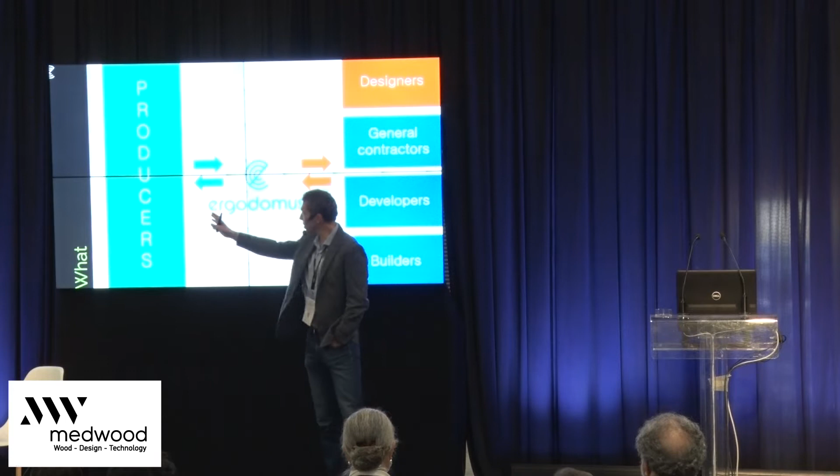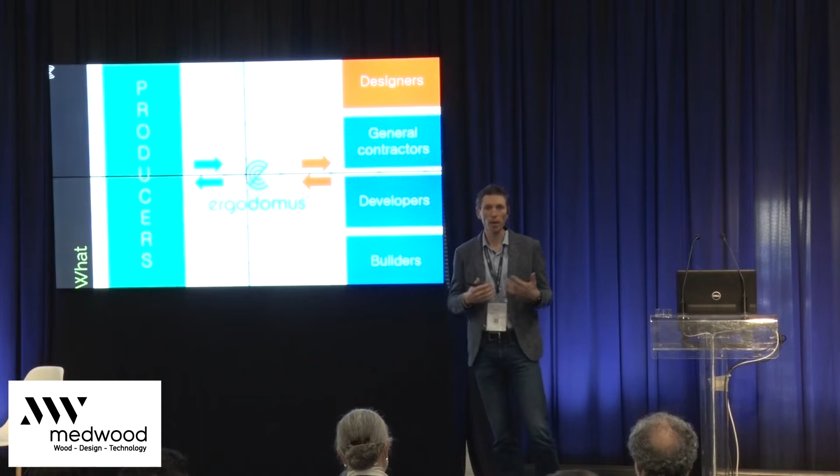Ergodomus is an engineering company, and we are located between the producers on one side and designers, general contractors, developers, and builders on the other side. This means that we work at the same time for many different types of clients. So we know how manufacturers work, we know how designers work, we know how builders work. We know what architects want, and we try to do our best to make them happy, and we try to get the most out of timber every time for every single project.

Let me show you also something great. This is the diagram showing you how the production of CLT globally changed in the past 25 years. In 1995, the global production was about 25,000 cubic meters per year. 10 years later, 130,000 more or less. 5 years later, we're talking about 300,000 cubic meters. 500,000 cubic meters 9 years ago. And the timber industry produced more than 1 million in 2018. So as you see, there is a big exponential growth of the production of CLT all over the world.

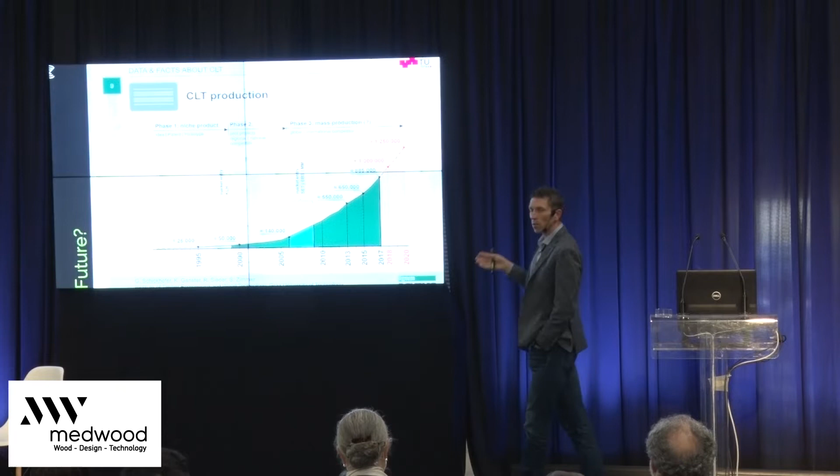If someone asked me, why should I go for CLT? Why should I study it as an engineer or as an architect? Why should I improve my knowledge of CLT? I just send this diagram. This tells us that it is the solution to go for. It is the material to go for, definitely.

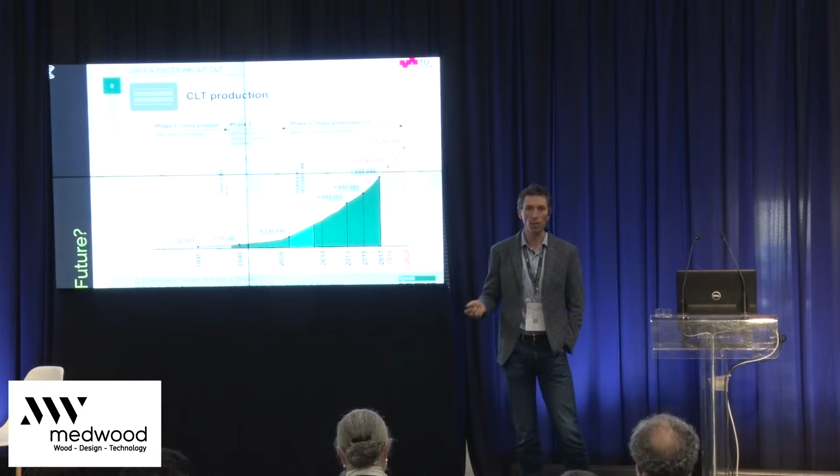But CLT, as I said, is not only a material. I think it brought a big revolution in the market. Because with CLT, we can really see timber as a digital material. It can be very easily implemented in a BIM workflow. It can be used for computational generative design, as I will show you later. We finally are talking about robotic prefabrication and CAD/CAM technologies. It is no more science fiction, it is something we are using. We've been using it for years.

DfMA is an acronym. I really love this. It stands for Design for Manufacturing and Assembly, and it means that once we design a new timber building, a new timber structure, we are immediately thinking about how the element can be produced, transported on site, lifted, and assembled together. We cannot design, we cannot engineer a timber building without having in mind how the elements will be produced.

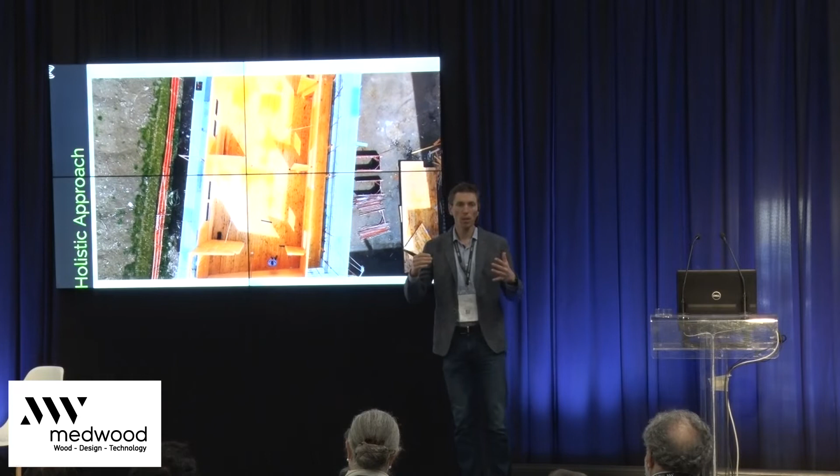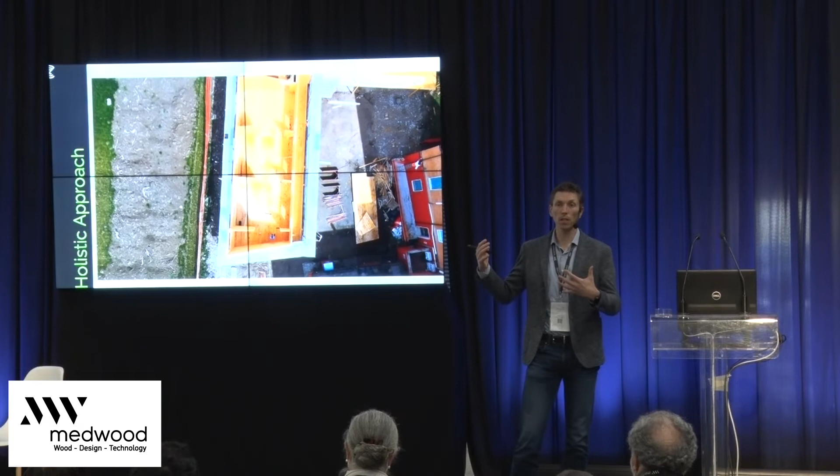And to have this holistic view, in my opinion, you need to raise your point of view. If we stand at 1 meter, you just see your feet and you do not know anything else of the building. So you need to go up 5, 10, 15 meters and above, because you need to have a global view of the project. You need to know exactly how the project would look like. You know, to see where the CLT panels can be stored, how the trucks can arrive to the site, how the lifting crane will work.

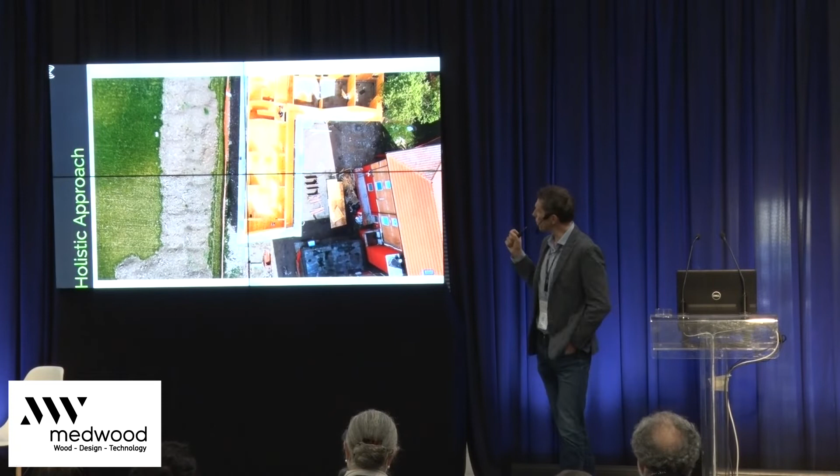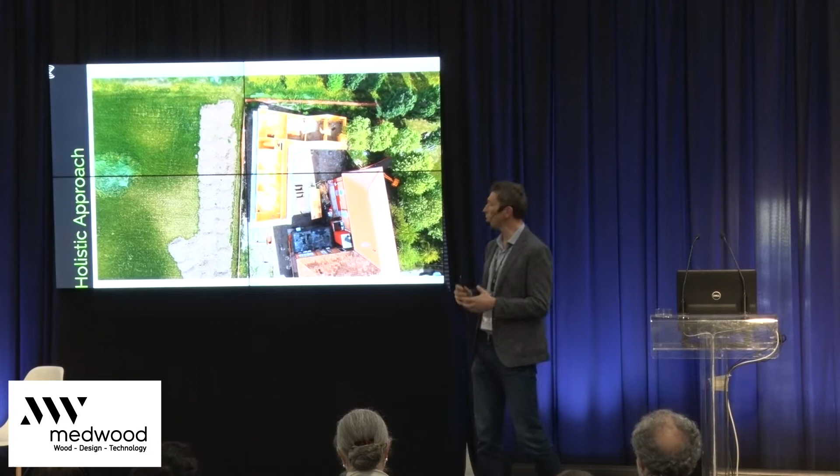And this is my way, my view of the timber sites. Please raise your point of view and have a global view, have a holistic view of the project. It's the only way to be sure that you will not have any problem on site.

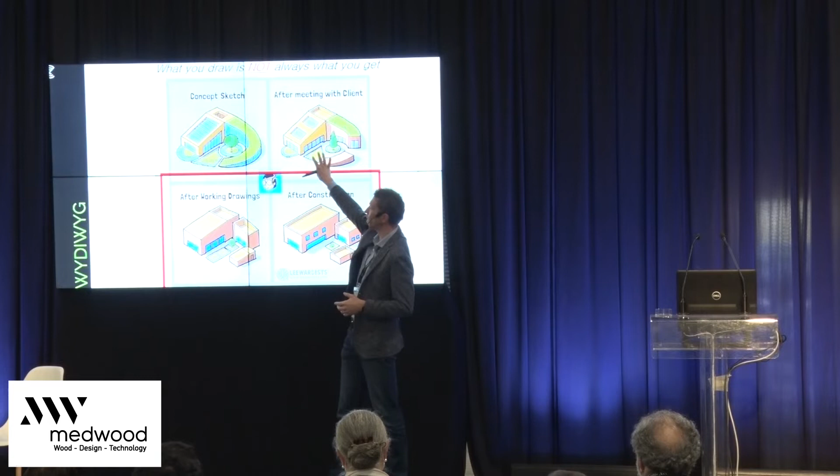I'm sure there are some architects, there are some engineers here, and this is the most frustrating part of our job. You dream something, you talk to the client, then you prepare some drawings, but then you get this on site. Why does it happen? Because we like to change everything once we prepare the drawings. We arrive on site and we decide to change the size of the openings, we decide to move the windows, etc.

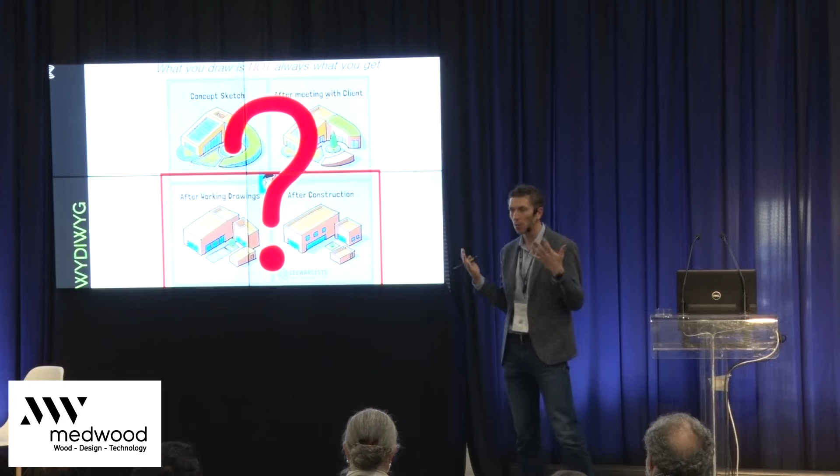With timber, I prefer to say what you draw is what you get. You draw something on your computer using the software you like, and then you get that element on site, exactly as it was on your computer. I'm sure many of you are familiar with 3D printers. The workflow is exactly the same. The only thing changing is the size of the elements.

Here we're talking about 50 by 50 by 50, more or less, the maximum size. When we talk about CLT, as we saw in the previous presentation by Albino, we're talking about bigger elements, up to 12, 13, 15 meters long, up to 3.5 meters wide. The workflow is that you draw something on your computer, you dream something, you create a detail, no matter the complexity, there will be a CLT machine creating the solid element you draw.

And before arriving on site, we give our clients the possibility to check everything thanks to the IFC files. So this means that weeks before having the CLT panels on site, you open an IFC file, you just click on an element, and you see what the element is. The thickness of the element, the number of layers, the timber grade, and the assembly number. You can check these 5, 8, 12 weeks before having the CLT panels.

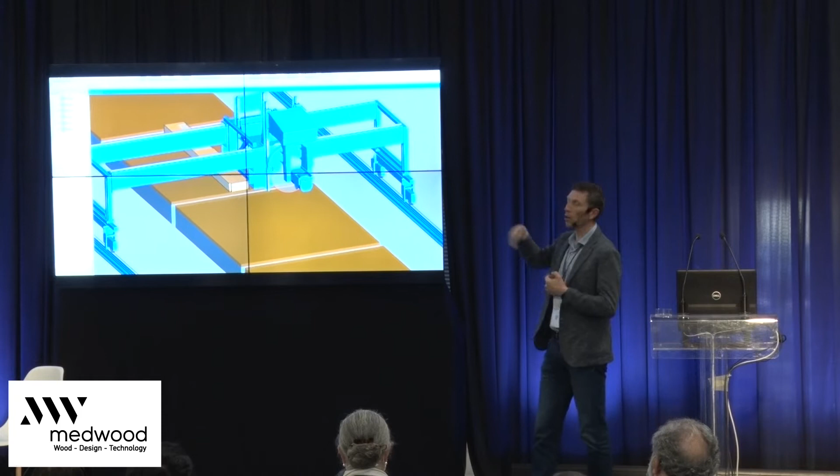We have no CNC machines, we have no factory, but we can check in the office how the CNC machine will work, and if it will work properly. Of course, here we increased the speed of the CNC machine. It takes many minutes to machine this element. But once we send the files for the robot, we can check if they are accepted by the machine, if we talk the same language as the CNC machine.

Having a digital model also gives us the opportunity to quickly share the drawings among different software. So this means that we can combine together FEM software, BIM software, Rhino, Grasshopper, and we can use one of those products as a hub. From this hub, we create a file from a single source. We create a file for the FEM software, for Revit, for ArchiCAD, Allplan, for the CNC machines.

And everything is a huge amount of numbers. It is just the model. We are just using in the best way the digitalization of the model. Let me show you some examples of some projects we worked on in the past years using these technologies.

And at the very end, I will show you a very special project we worked on for weeks, which will happen in Australia in August, September, we hope, because we made a lot of experiments, a lot of tests on this project to see how we can use double curved beams made of timber.

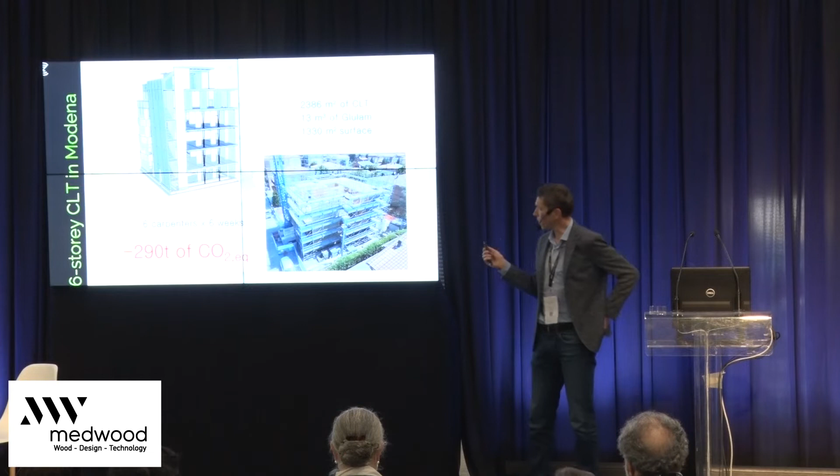I'm not saying that if you go for timber, you will never have problems during an earthquake, but I'm just saying that timber, for sure, as we saw before, is a very good material to go for in a seismic area like this one, or like we have in Italy as well. We're talking about a 6-story building, and as Albino said before, the average is that you can build 1 floor per week. Can you imagine to build 1 floor per week, how fast they are in assembling the elements?

But what is even more amazing is that we started from a digital model, and here at this stage, architects, designers had the possibility to tell me, I need an opening here, here, here, here, with this size. I want to move the opening 10 centimeters above, 10 centimeters left or right. And you can do this without any extra cost, just working on the digital model, just sharing the IFC file, just sharing the file in Revit, ArchiCAD, Allplan, or whatever software you use.

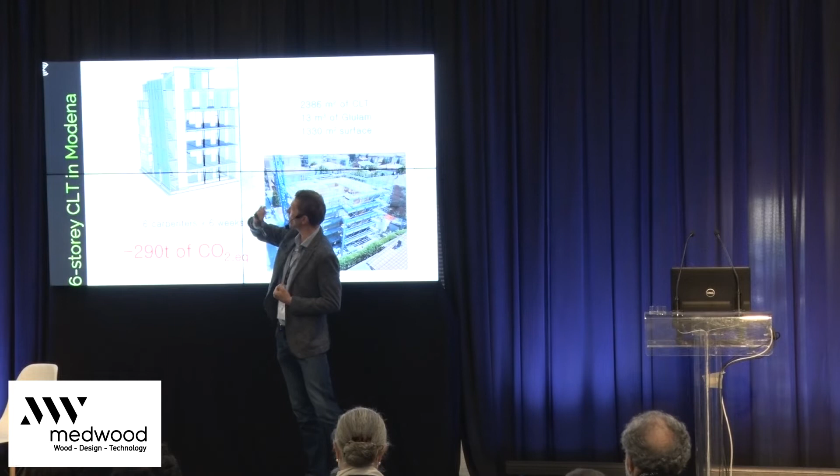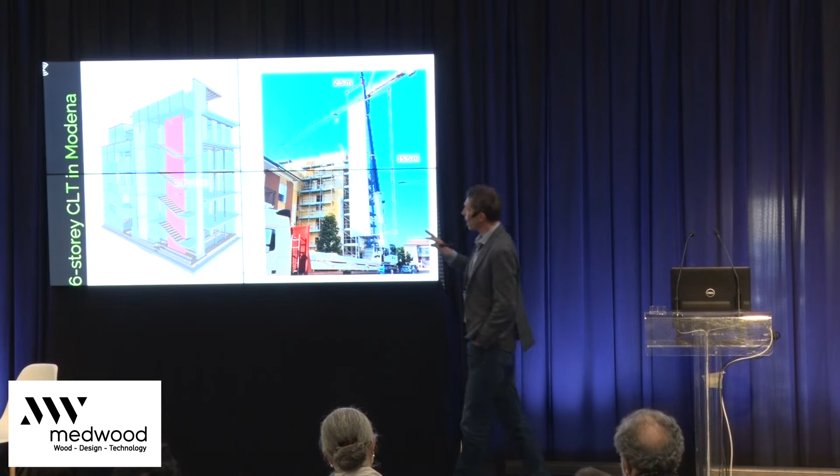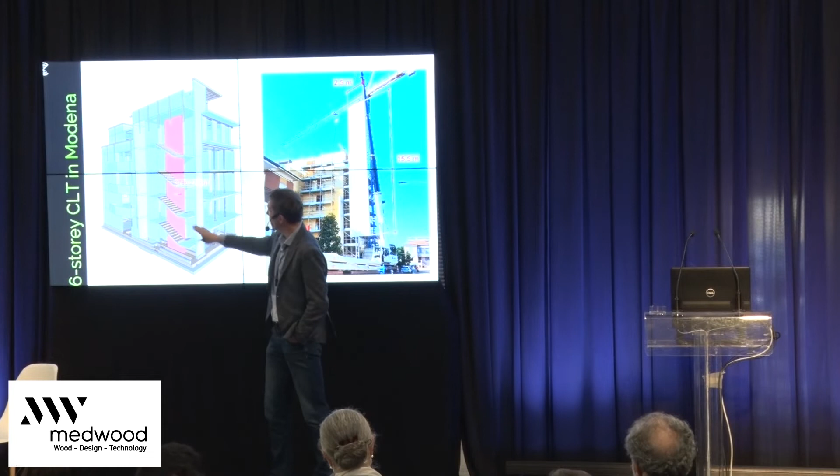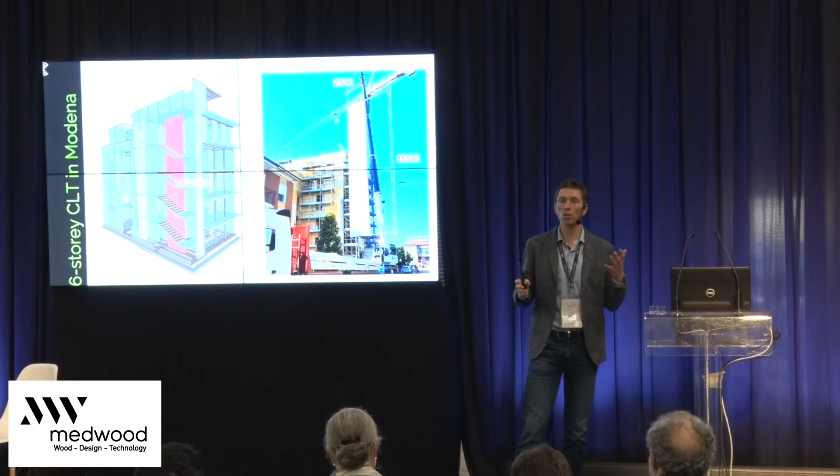Then they approve, they sign this drawing, and they say, this is what I want to see. This is what I want to have on site, and they will get it. It was quite a challenge here because we wanted to have a very big CLT panel for the shaft, because everything is made of timber. There is no concrete. We use concrete just for the foundations, as you can see here, and this is the element you see here. So we're talking about a very big CLT panel, which is 2.5 meters times 15.5.

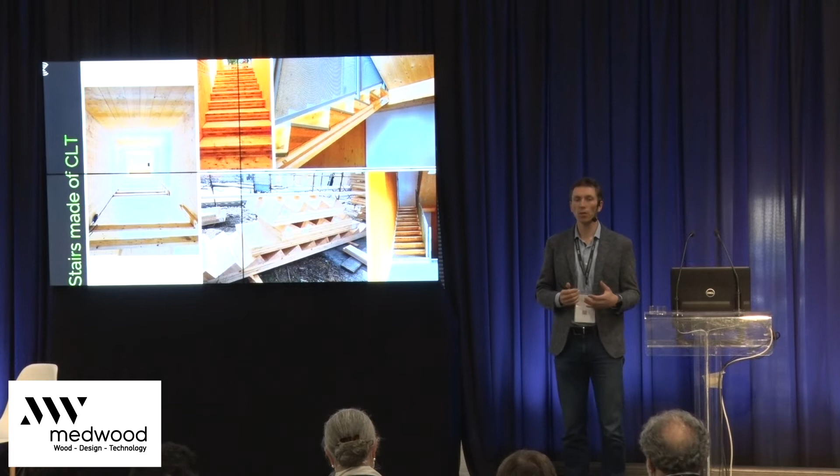Together with the developer and together with the architects, we decided also to use CLT for the stairs, and you can see how they look before being installed. The ramp is made of CLT, and then the steps are made of glulam. You do not have to draw the stair on the wall and be worried: will the assembler, will the craftsman work properly on site? Will I get the stair as it was in my drawings? They produce the element off-site, they bring the element to the site, and they just install the stair on site in a few minutes.

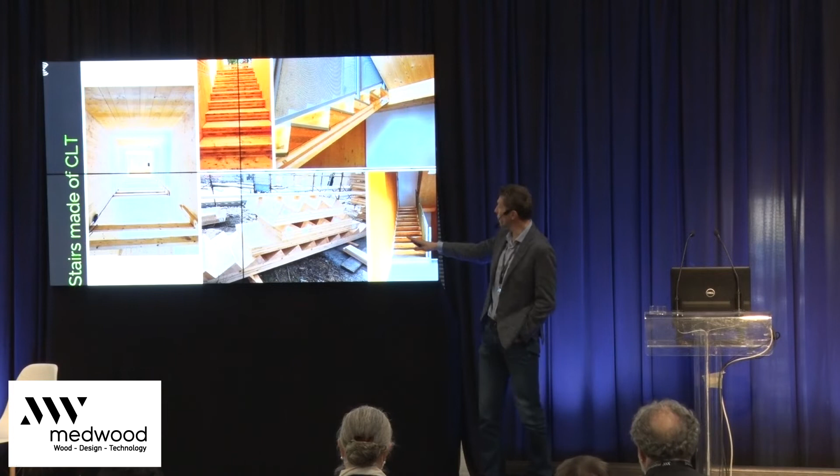Then you just need to cover it or to leave it partially exposed. It is up to you as a designer. The stair you install at the very beginning of the assembly can stay there. You do not have to remove it or to rebuild it. It is a temporary stair, but it stays there for weeks, for months, forever, during the entire life of the building.

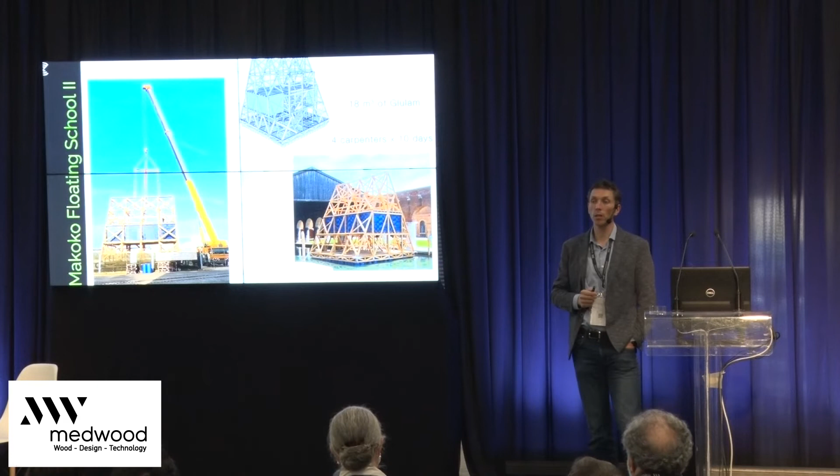This is a structure we engineered for the Biennale in Venice in 2016. We had just 10 days to assemble everything and to bring it to the water.

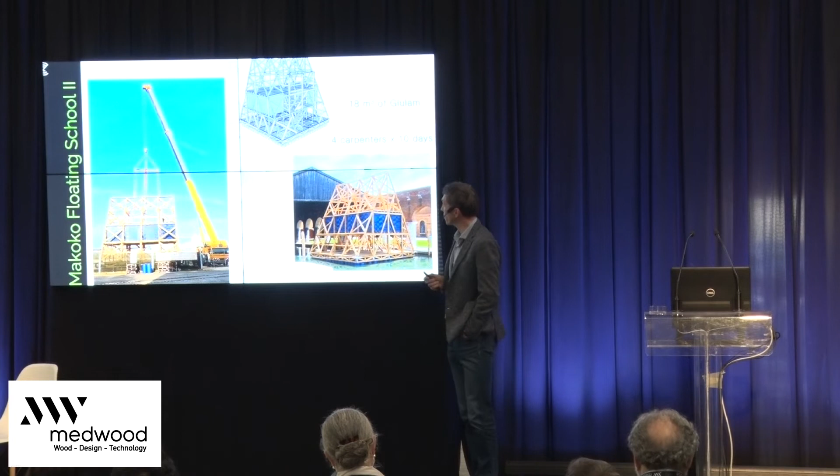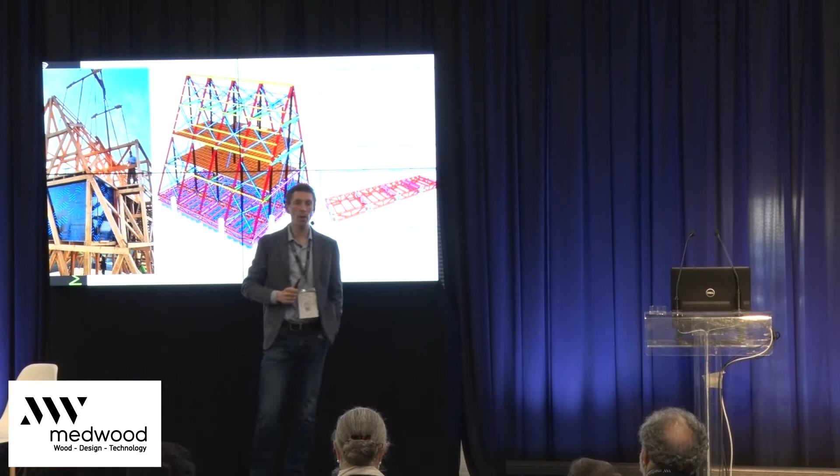So to do this, again, we used very deeply the potential of the digital model. You see the digital model here in the middle, the production drawings, and here you see the assembler when we were making the first test before putting the structure in the water.

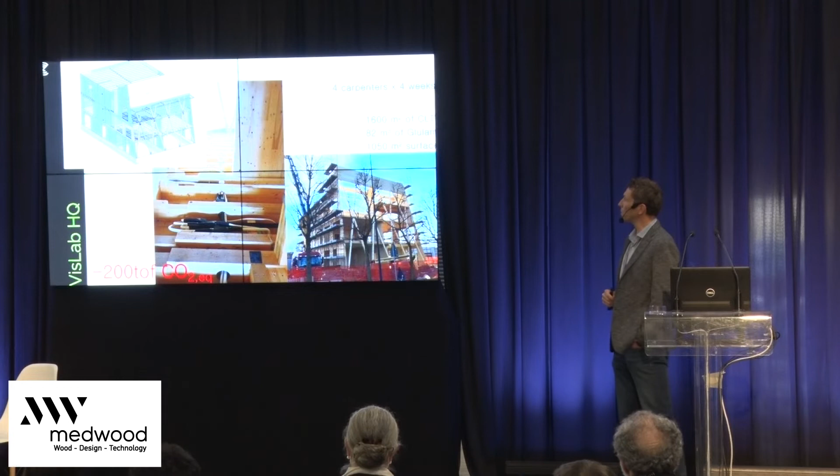Another project, this is a headquarter of a company in Parma, inside the university. We're talking about a 4-story building, and again, 1 week per floor, and they completed the structure. Together with the developer and together with the university, we had a request to reduce as much as possible the thickness of the slab.

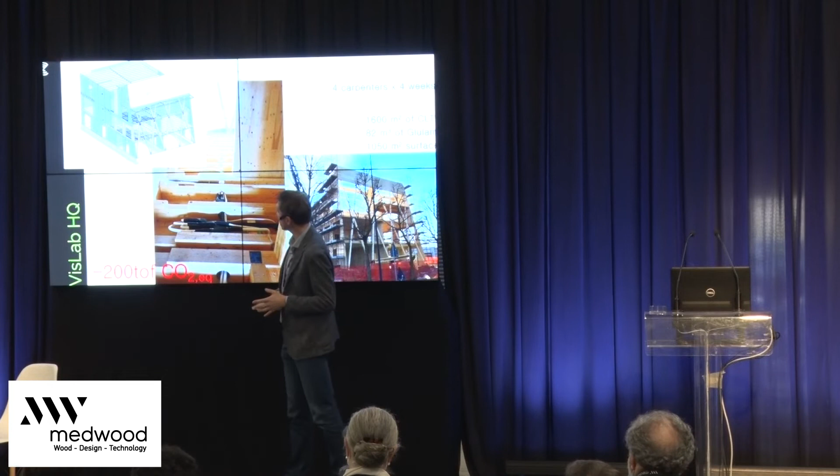So we created ribbed panels, and all the installations run through the structure. But all the holes were made off-site in the factory, so that we didn't have to create those holes, those recesses on site. Off-site, in my opinion, always wins. Must win. You see here another detail. We have a hole and the installations going through it.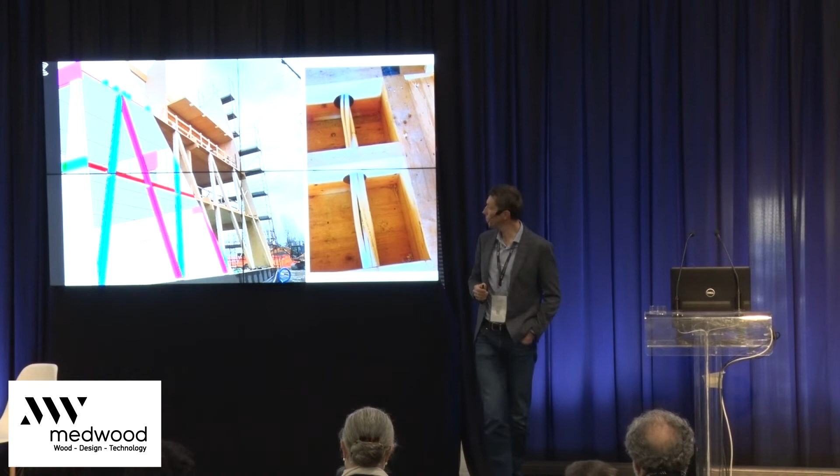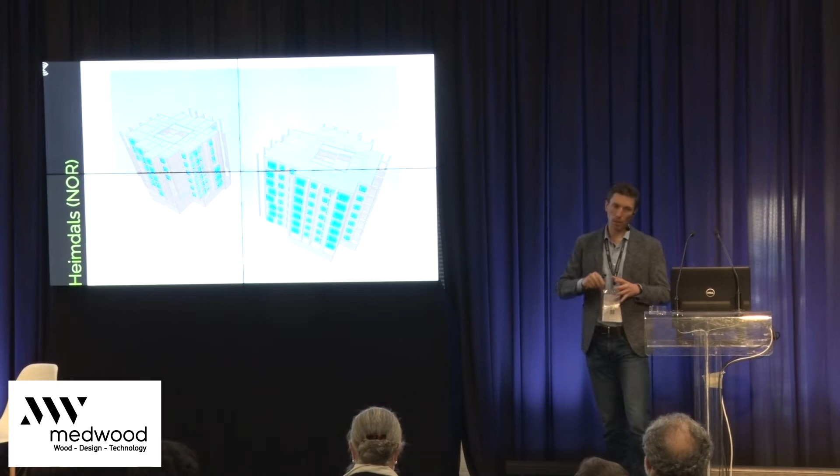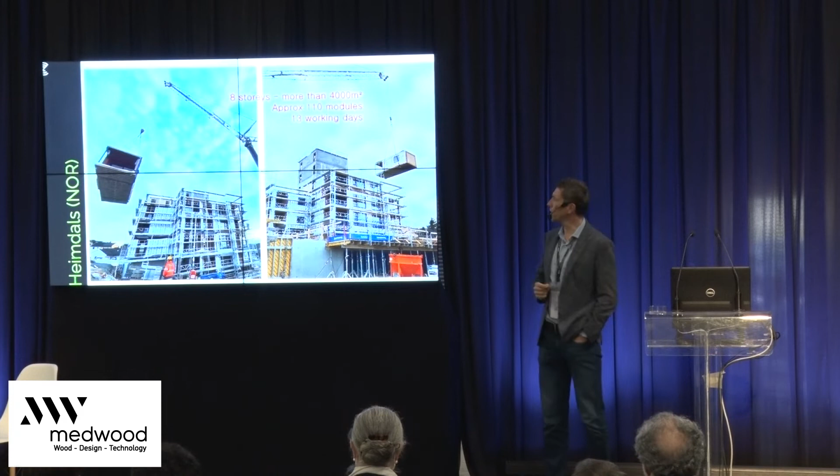This is another technology we tested, and it is a modular building. We engineered it in Norway. It is an 8-story building, where in reality there are 4 8-story buildings. As you can see here, we engineered modules, and the size of the modules is 4.2 meters, 3 meters by almost 12, 11.8, 11.5. And they assembled an 8-story building in just 13 working days.

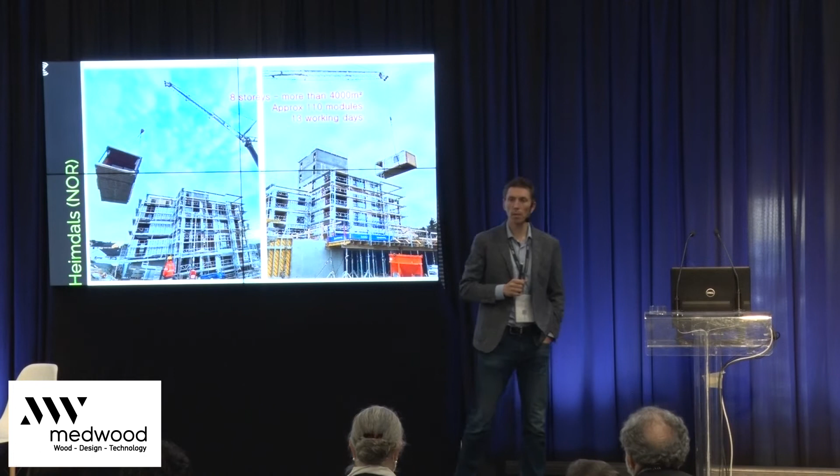We're talking about 110 modules. They assembled more than 10 modules per day. At the beginning, they were a bit slower, and then they got faster. And this is the technology they used. This is the reason they were so fast. We helped the company to develop a super innovative connection to speed up the assembly of the elements so that they almost do not need screws. Just a few screws, and they connected the modules together.

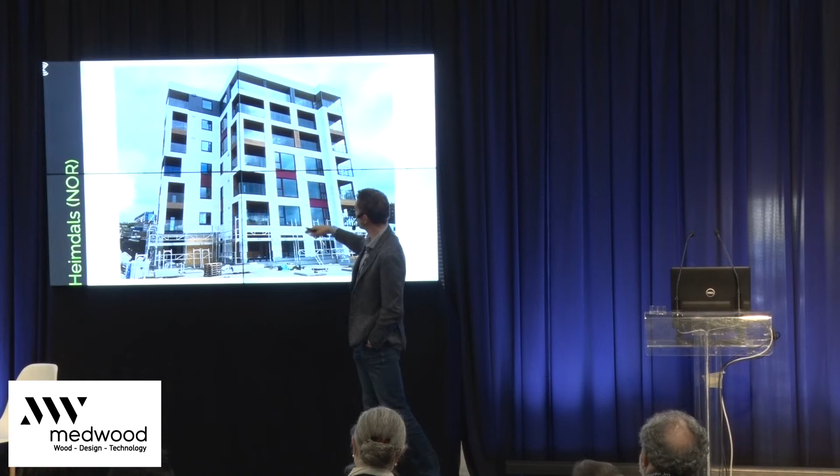This is the FEM analysis of the building, and this is how it looks like today. As you can see here, nobody can say this building is made of timber. All the timber elements are covered. There is a nice facade, a ventilated facade. You see some elements for the ventilation. You see the windows. You cannot say that it is a timber building, and you cannot even say that it is a modular building.

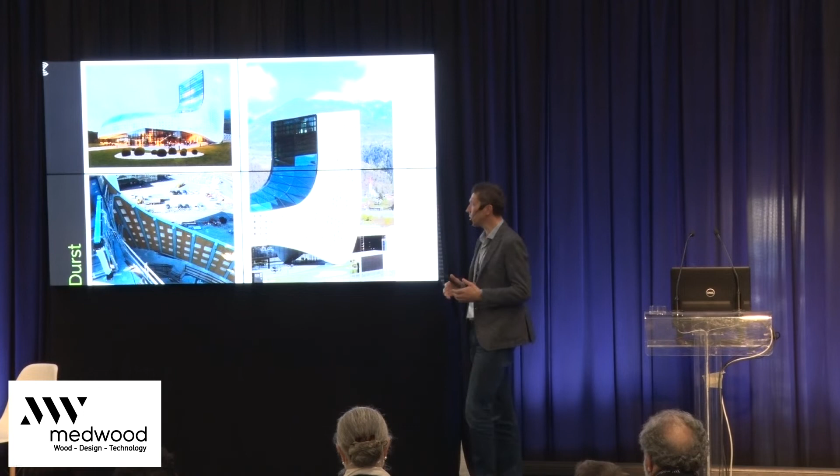Another very innovative project is this one. It is a headquarter of a company in the northern part of Italy, in the Alps. It is a super hybrid building because it is made of concrete, steel, and CLT. The facade is made of CLT because the architects wanted to have hundreds of openings with a different size and placed in a very specific position. And CLT was the cheapest solution to go for.

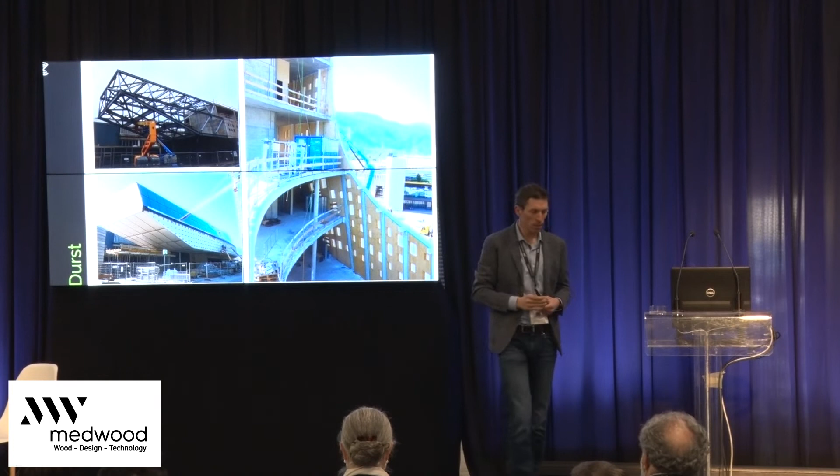So we started working together with them, sharing the files in Rhino and Grasshopper, and testing a workflow to transfer the drawings from Grasshopper to the CNC machines. Here you see some pictures, concrete, steel, CLT, combined together. I think if we want to promote the use of timber, we cannot be purist like either 100% timber or nothing. We need to combine together different materials to get the most out of each of them.

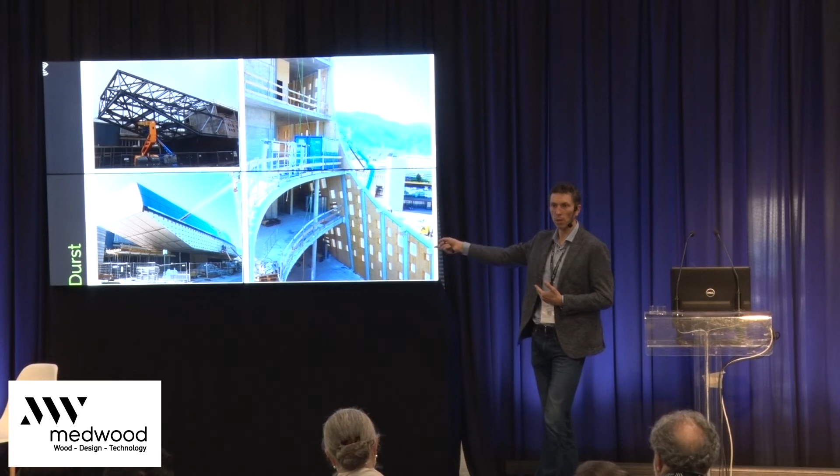So if they asked me, are you happy with the timber buildings? Absolutely yes. Let's go for a hybrid. Steel, concrete, timber, getting the most out of each of them. This is the digital model, and this is what they built on site. The IFC model is this one. Once again, the designers, the builders had the possibility to check everything on the 3D model.

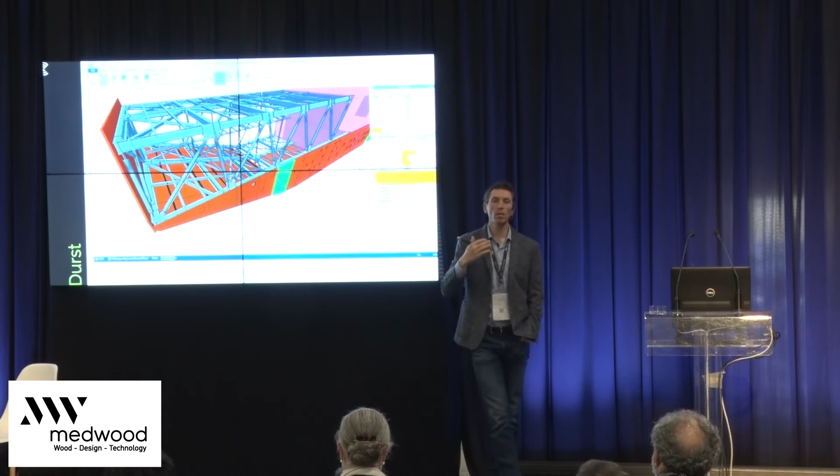We shared this file weeks before starting the assembly of the CLT panels, weeks before starting the production of the CLT panels. And here you see thickness 100 millimeters, the length, the width, timber grade, position number. Lotto 1 means it will arrive with truck number 1. So you can even know when the element will arrive on site. If we're talking about a container, here you see the number of the container, the row where you will find the element. So you know if it is at the top or at the bottom of the container.

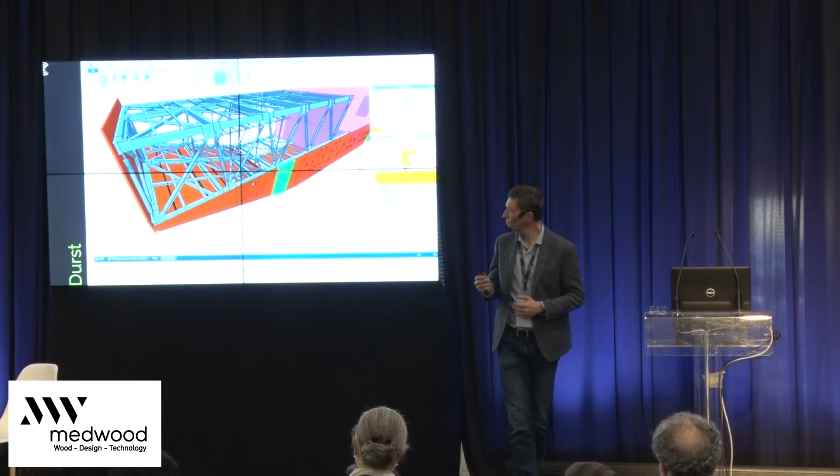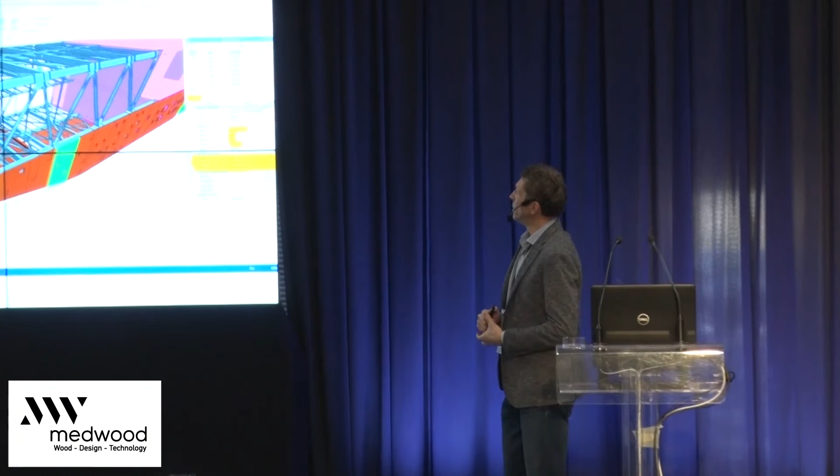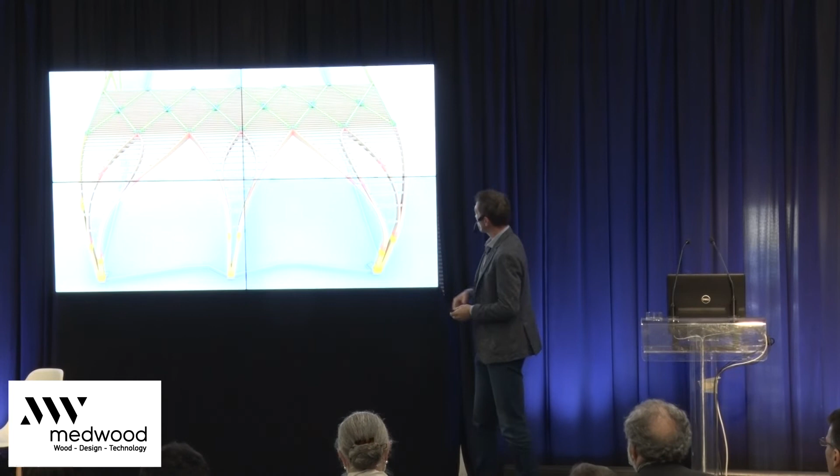The very last project I'm going to present to you is the one in Australia. I'm very proud of this project because we spent thousands of hours to develop the workflow and to develop the model. But now I can share with you the shape of the building. Well, it is not really a building. It is a super expensive roof, which is made by single curved beams.

The yellow ones; red ones, meaning the red color on the outline, means double curved and twisted beams. Green beams here are straight. Here we used software like Rhino and Grasshopper to create the digital model, to create the elements, and then from that model, we even prepared the files for the CNC machines. So we could control everything on the project in this case. Every single detail of the project is a parameter in Grasshopper.

I don't know who is familiar with those tools like Rhinoceros and Grasshopper combined together, but this really opened new doors for us. It gives us inspiration for many other ideas we're working on. And what is amazing is that the connection between the double curved beams and the straight beams are made of steel plates with an L shape.

The algorithm we created allows us to change the shape of this beam and to update automatically the production drawings of 800 elements made of timber, made of steel. So we worked together with the architect in finding the right shape of the beams, but now, fortunately, they will never change the idea because they have produced everything. They are complete in the production.